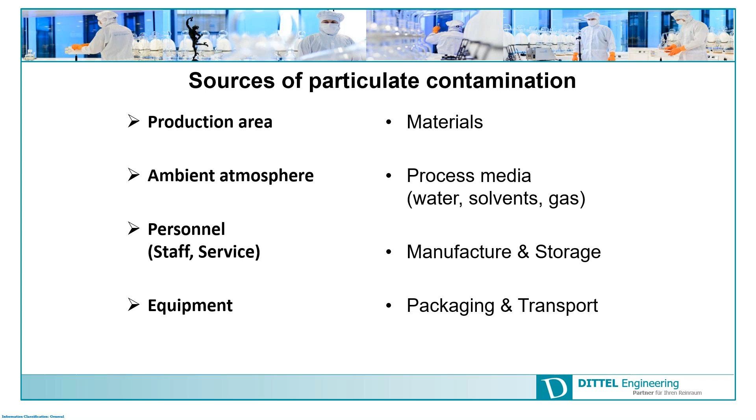The highest risk point on this slide is the thematic of the staff, because it is not so easy to handle the staff and bring them all the ideas you have, or to train them. They need to understand how a clean room, or our clean room technology, is working.

Here, by the air circulation, you see in a short rundown that you have a clean room, with the entry area from the change room, from the airlock, up to the process area. The whole area is managed by conditioned, transported air. We therefore have particle separation via final air filtration.

It depends on the classification of the processes and the room itself. We have the conditioning of the air, and we have the pre-treatment of the fresh air. We need around 20% of the total process area as fresh air. If you have around 100 cubic meters an hour, you have around 20 cubic meters of real fresh air, and you have an exhaust of the contaminated air.

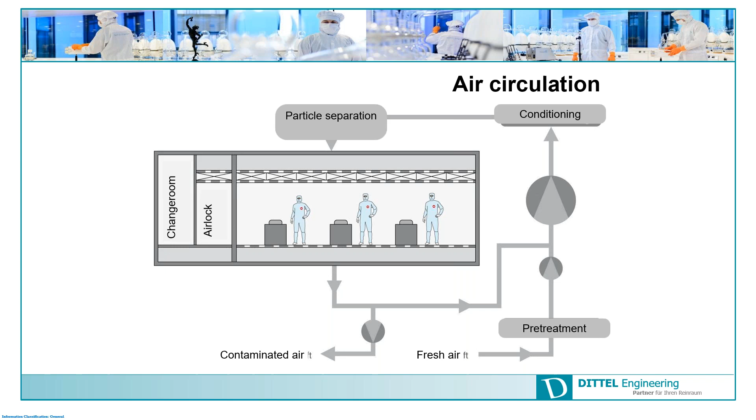So next, the pressure cascade. Here you see the clean room systems with the fluids, with different classifications managed by ISO class 6 or by GMP. GMP, good manufacturing practice, is responsible for the total system of aseptic technologies, with an intersection and intercommunication between the non-aseptic and the aseptic technologies. So for each sector, each different class, we need around 10 to 15 pascal as a differential pressure, and this 10 or 15 pascal is maintained from one area to the next.

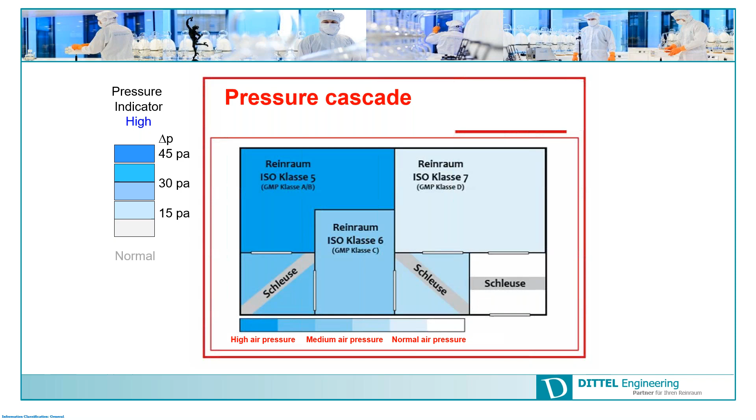But you have to consider this classification and the hygiene factor, so please consider as well what type of persons, how many persons, how many service engineers, how many visitors - all these factors complete the total air consumption and all the necessary requirements for the ISO and GMP classification.

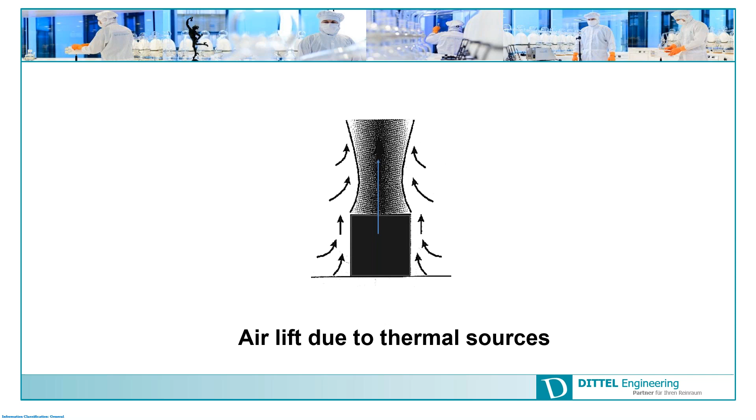Most of the time, we never look at thermo and thermodynamics and fluid dynamics or air fluid dynamics. This will show you a very simple picture: you have a heat-up sector, and the complete air which passes by in the final filtration system nearly touches the process area, then heats up and turns back, and you get a big circulation in the room, a highly turbulent system, which should not exist.

Better you see this here in a picture. You see here the Sahara, you see here the end of Spain, and the outdoor - this deep pressure weather from the Azores brings you high turbulence from the Atlantic Ocean, and therefore a lot of rain. And right now we don't like the rain - we have so much, and we need much more sun.

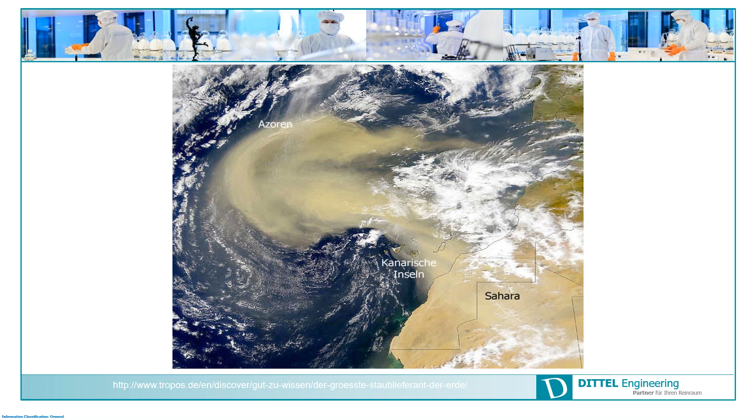So in this case, the heat-up of the air in a special way - here you see the process type of our planet brings us the same thermo and airstream dynamic that you have in the clean room.

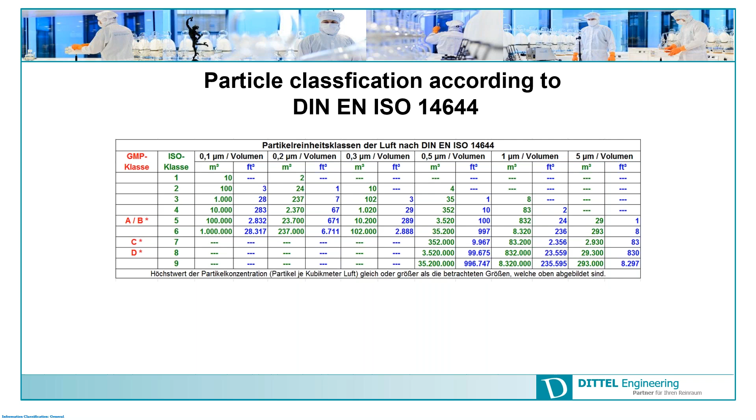So, downstream velocity of particles. It's very nice if you sit at home in your living room and you're looking at a spotlight, and on the spotlight you see, oh God, what's happened - a lot of particles running around or flying around, and they are still in the air.

To give you a small impression about the theme of downstream, here you see a particle of 5 micrometers in size, which has a theoretical velocity of 1.4 by 10 to the -3 meters each second. So this particle needs 23 minutes and 49 seconds, theoretical calculation, to settle out over a distance of 2 meters, and that is not very much.

If you go down to the GMP number of 0.5 micrometers, it takes 1 day and 3 hours. And if you consider a particle in a microelectronic facility or in biochemistry and bio-nano themes, a particle of 0.1 micrometers needs around 13 days to settle down to the floor. Then you come very motivated, like doing a broom, running around, and behind that is a factor of square 2 - all the particles are still in the air at around 1.7, 1.8 meters, and everything you thought had fallen down is still in the air again.

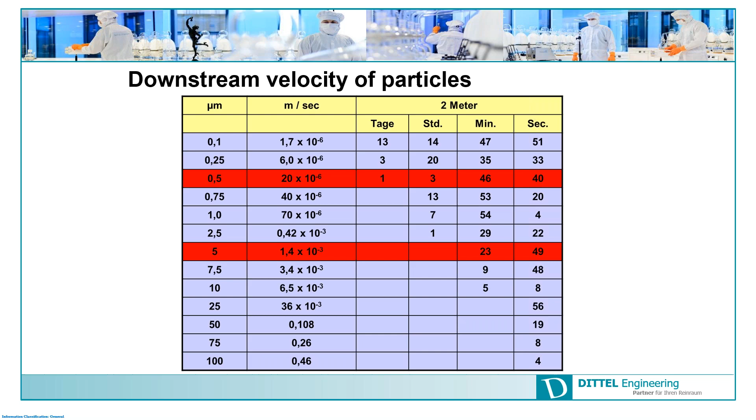Okay, so to see the sizes and have a small impression about the sizes - where is the smoke here - so for a good cigar, it's nice. So you have the smoke particle, this is around about 1 micrometer. Then you have the dust with about 5 micrometers. You have the fingerprint, and the fat zone of the fingerprint is around about 30 micrometers.

And a hair of this young little lady sitting here in front of me - yeah, I have guests with me, that is very important - so the hair has a diameter of around about 60 micrometers. And to stop such things contaminating the air...

If parts like this contaminate the air, I give you a small story. A couple of years ago, I wanted to know how clean my environment, or my living room area, was.

So I closed all the windows, put a film in front of the windows, a black one, so that everything was covered and the living room was completely dark. And with a particle counter - believe it or not - in around about 1 day, not one particle was detected by the particle counter.

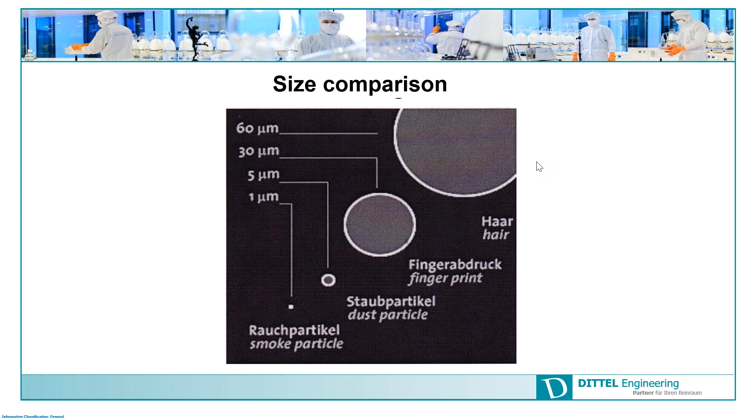And then my wife said, 'Oh, now let's open.' She took only the film away, and then the particle counter started to count and make beep, beep, beep, beep, beep. So what happened? The sun was shining in, and the sun creates a thermal effect, and all the small particles that were located on the surface of the table or somewhere around started flying. And that is the same principle as in a clean room.

And I turned around, and in this moment a glass started rolling, and she caught it with her glove, and the fingernails were in front of the glove. So you see, that shows you that you need a high principle of self-controlling, not only on your duty, on your job - no, you have to have the same principles at home. It's an old truth that the controlling of clean rooms, biological and particle controlling, needs a completely different thinking and a different behavior in your private life too.

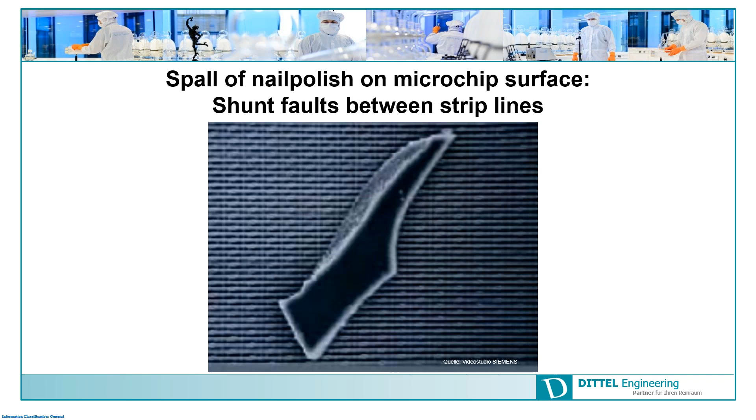So the next topic will be germs, pharmaceutical products. A couple of years ago, what happened - a friend, a good friend, is the owner of a company, and they had a big problem with bacteria and contamination. Where did this contamination come from? After a while, they found that this one guy from the process line had a farm at home.

Every morning he had a shower, then breakfast with his family. The children went to school, and he went to the stall. He went across the farm and looked at his cows, saying 'Good morning, my baby,' and every cow got a pat on the back, and then he started his way to the clean room, to the factory. A couple of days later, they had a big problem.

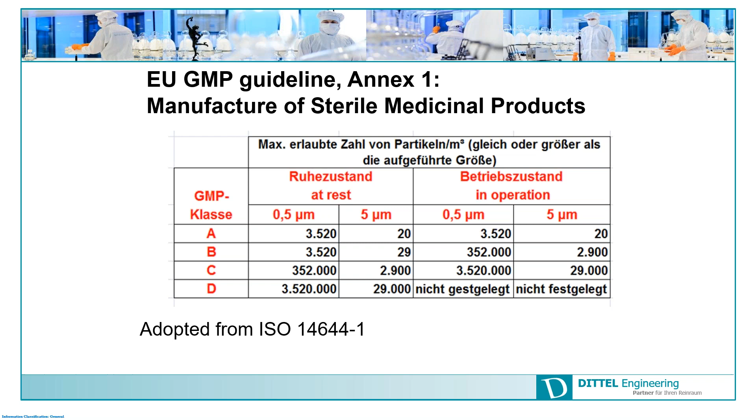Superbugs. If you discuss standard Staphylococcus aureus, that's with everybody. You have some on the ears, on the nose, left and right, on the eyes, and some on the buttocks and in front of the genital area. That is not a bad thing. You control your own, and normally with regular hygiene you do not have a big problem.

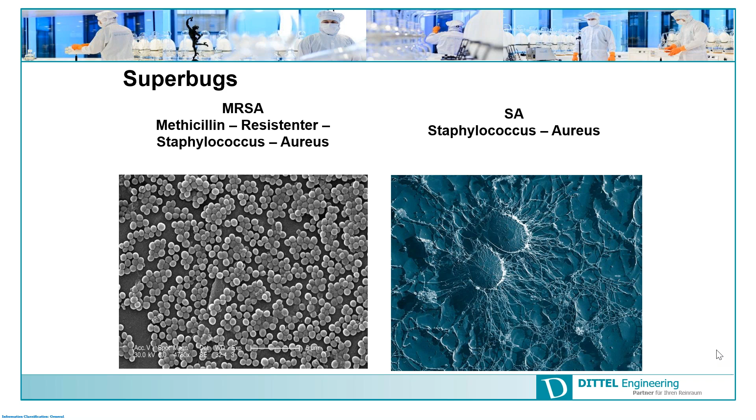The electronics are not doing what I want.

So here you see a few pictures I have taken for you of a multi-resistant Staphylococcus aureus, and all of them were created not on the open market or in the supermarket or wherever. No, created at home or by non-hygienic treatment in a hospital or by a doctor.

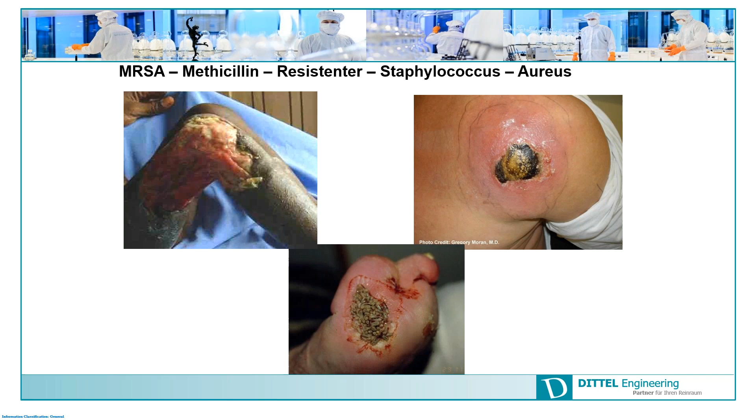So germs on surfaces and contact plates. I know everybody knows it.

What, 20 minutes? Oh, okay. I have to hurry up. Thank you. Showed me I only have 20 minutes left.

Germs on surfaces. It is well known to all of us. But the issue is, if you are not trained over time, it goes wrong. What is going on with the training on hygiene, the complete training, not only for germs but for the use of contact plates: you have roughly 3 months of standing knowledge. After 6 months, you lose roughly 70% of the knowledge, and so you need retraining. Think about that, consider that, and don't forget. I know it is very, very simple, but very simple things are killing our environment in the clean room.

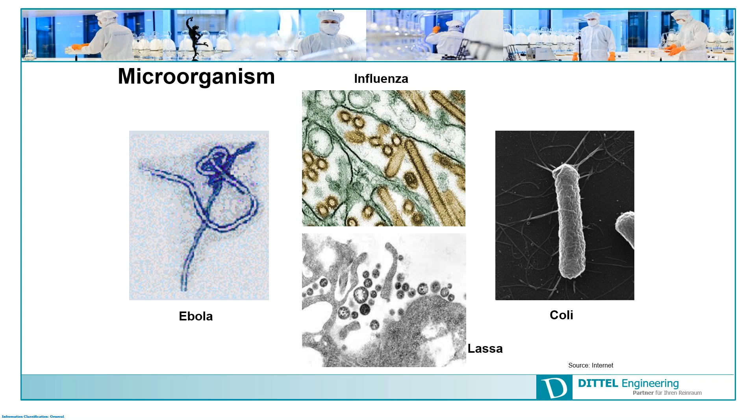Coli is for us here the most important. Influenza, if you have a high temperature by 39 degrees body temperature, you stay at home and you take care about yourself. Coli, nobody is feeling, oh, I'm contacted by a colibacterium. It comes, and if it's your own, then everything is fine. But if it's a foreign one, they don't like to get mixed. Risk included, people and technique. I said before, you have to train the people to reduce your risk.

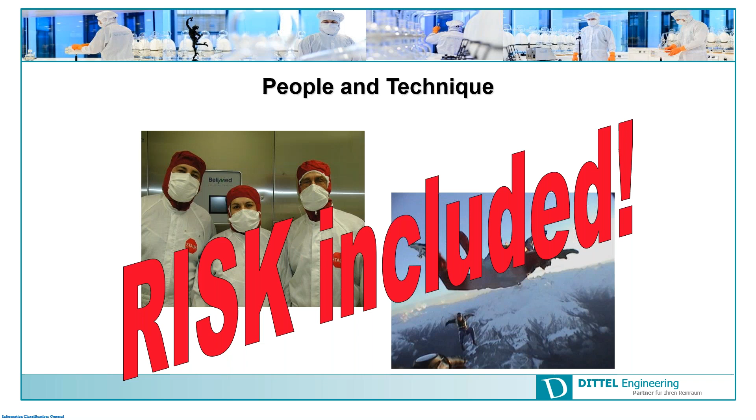How you're doing on your risk management for some field of microbiology. It is like parachuting, or you stay somewhere in an area and you don't know what is going on. And before you start in a clean room or before you start parachuting, you need to be trained, always trained. And training is one of the most, for us as well, one of the thematics that needs professionalism.

Okay, sometimes you see the protocols like on a gas station on the interstate. Yes, I was there 12:15. The next cleaning 1 o'clock in the afternoon. The next and so on. That has nothing to do with professionalism. So the protocols, they are very important, first for ISO 9000, and for your GMP and later on for your FDA compliance.

So wiping sweat from the forehead. Yeah, it's nice. He's doing this right now, and wow. And you take your hands and bring them to the trouser, and yeah, you see it. That is not a fairy tale. That's a real story, and that is going on every day.

And most of the time, if nobody looks at them, you have manufacture with torn gloves. Yeah, torn, cut. The torn glove. You have the face scratching, so it's nice. Or the hair. Yeah, that is the reason why after a couple of years the hairs disappear on this point. Not your hair, but sometimes it's, yeah.

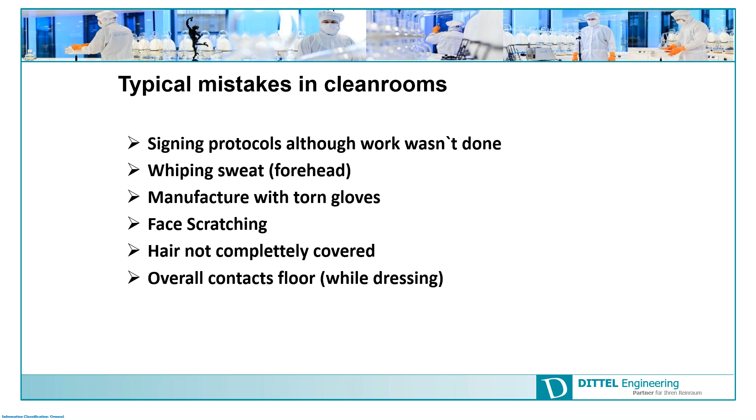So, impact on production hygiene. The personnel, together with the management, the production personnel, the staff, and the external personnel. If you have external personnel, you have to control them. You have to look at how they are washing the hands in the black or the outside area, how they make their sterilization of the gloves, and do they use the garment perfectly, etc. And the same is for the management.

It was here not far away from us, a pharmaceutical company. We had an audit, and it was perfect. Then the CEO came in, dressed perfectly in clean room dressing, with a few Japanese people. Everybody was perfect. He directed them to the processes, then he left with the group, and then the door opened again, and he came in with his suit, not in clean room dress. "I forgot my mobile phone." So the audit was gone, finished. And that's another story.

You see, the management needs more or less the same training as the personnel, or the management will be guided in the clean room. It is not like a jumping area where you can go in and go out. And the same situation if the horn is ringing and you have an alarm, you have to go in. You need to dress. If not, the complete clean room is contaminated with unknown particles, and in this case with unknown microbiological material.

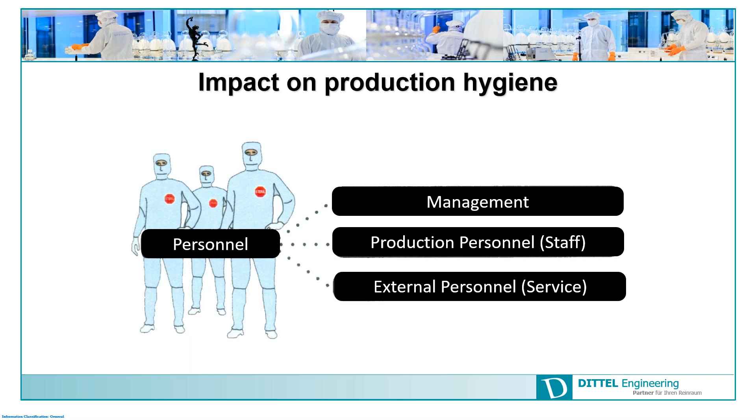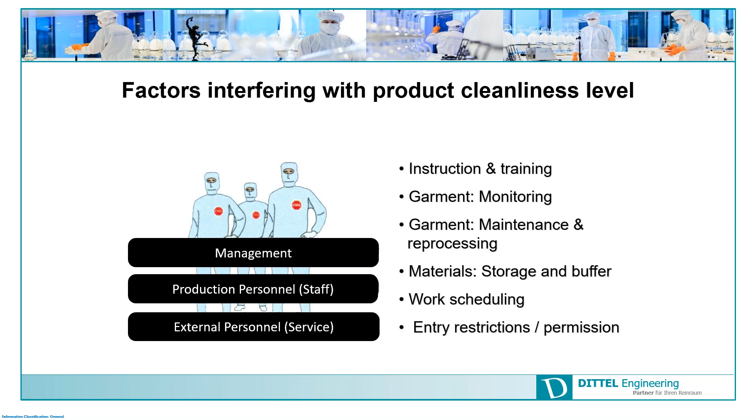And the staff as well needs the training. So that is the same with interfering factors for the cleanliness level of the product. You have the management on one side, you have the production, and you see the instructions, the garment, the maintenance and reprocessing, and so on. So let us see. Flows. Very easy from the gray area to the clean room. It is not a very complicated situation, but if you're following these three blocks here, you will never do something wrong. So use it as you have to use it. In this case, everything is fine.

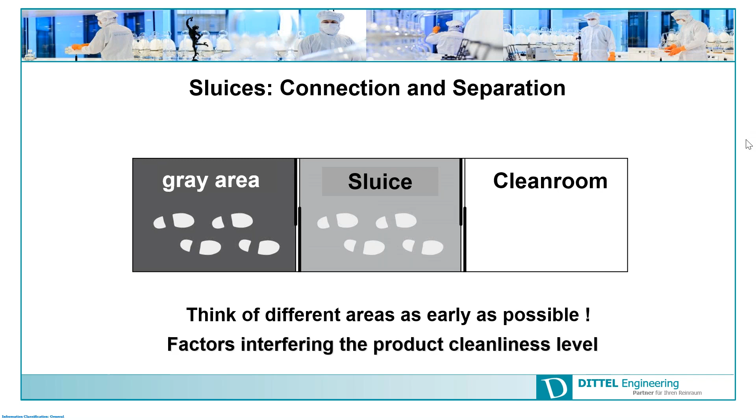So, geht's wieder? Sure. That is high tech, I call it. Geht nicht.

So here you see the entry system. You see outside it's a gray area. You have the black boxes. So it's arranged across the corner so that nobody is able to enter without using the sit-over bench. So, geht wieder nicht.

And if you start with a project, please, before you start thinking about which engineering and which area, start with a user requirement specification. With the user requirement specification, you find out which types of SOPs and which sectors you need. So that is just a small help.

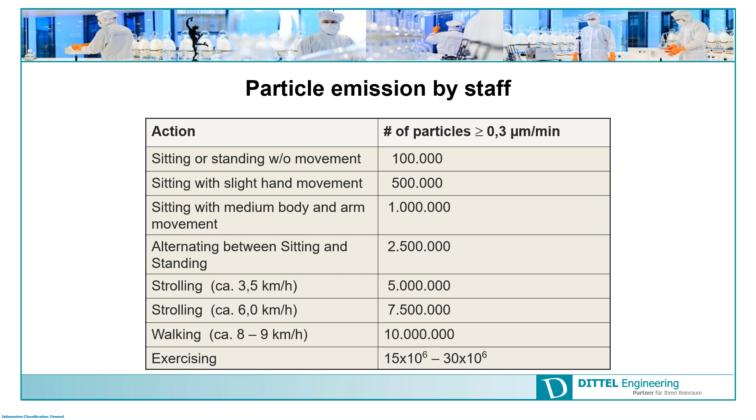Another story: during an audit, the audit was good, fine, but on the other side of this area there was a building with the CEO, who had a direct view into the clean room area. The people in the clean room were standing there, we had a discussion and everything was fine. Then the door opened, the boss came in and was shouting to everybody, move and go on with your job, why do I pay you, and so on. Okay, thank you very much. Half a year later, the company did not exist anymore. So you see that it's important, and if you consider everything the right way, you never go wrong.

Germs, the distribution: finger touch, hand touch, sneezing, saliva, and nose secretion.

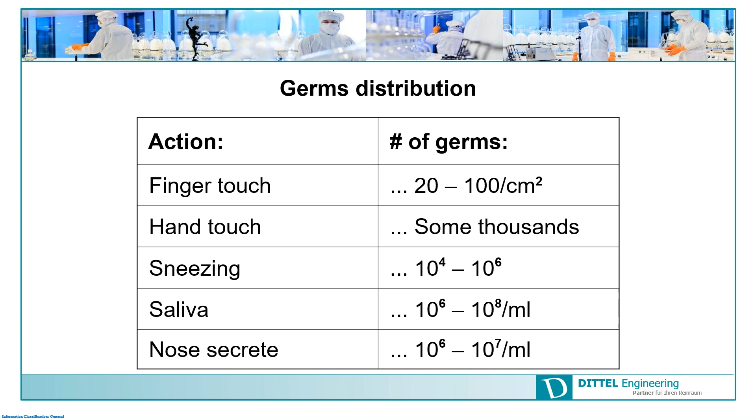You see how much it is: finger touch between 20 and 100 per square centimeter, hand touch a few thousand, but nasal secretion is 10^6 to 10^7 per milliliter. So hand disinfection: we say you pray 3 times, and that is, from the time, very good. Or for children, I tell my grandchildren, okay, if you start finger washing, sing a song, Hansel and Gretel, 3 times, and that is working.

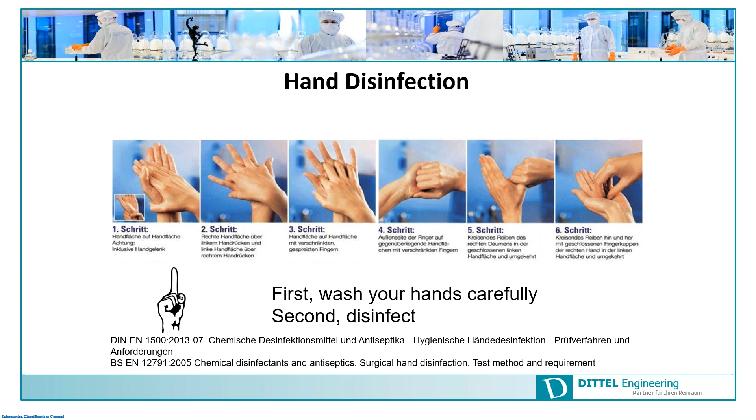So you need a time frame, which step, and last but not least, how much and what time. It's just learning by doing. But what is very important? First, wash your hands carefully, and second, disinfect. So you need a hand wash. That is the same as brushing your teeth in the morning, after lunch, and in the evening. And then to wash the fingers as well.

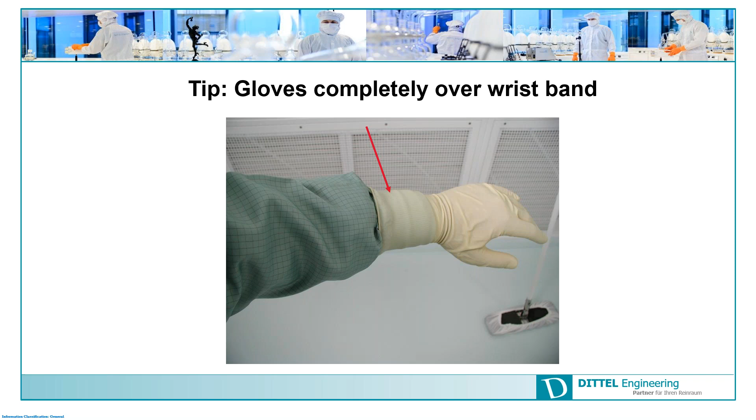Okay, so gloves. Most people are using gloves like Robin Hood, and so in the front the skin is exposed and so on. So you see here how a glove is used. It is important that nothing comes out covered with skin particles and hairs, because everything is rubbing inside.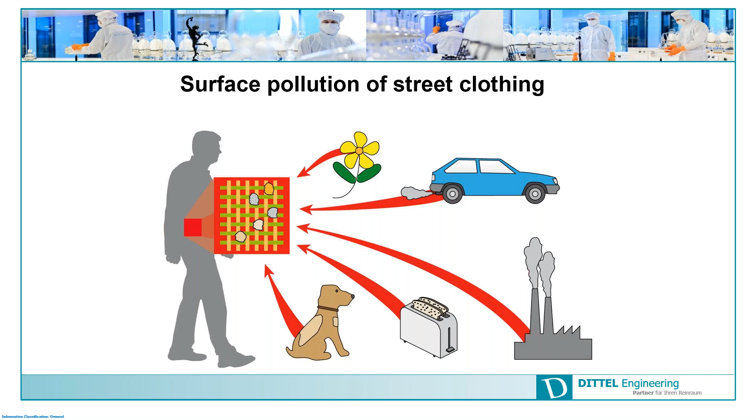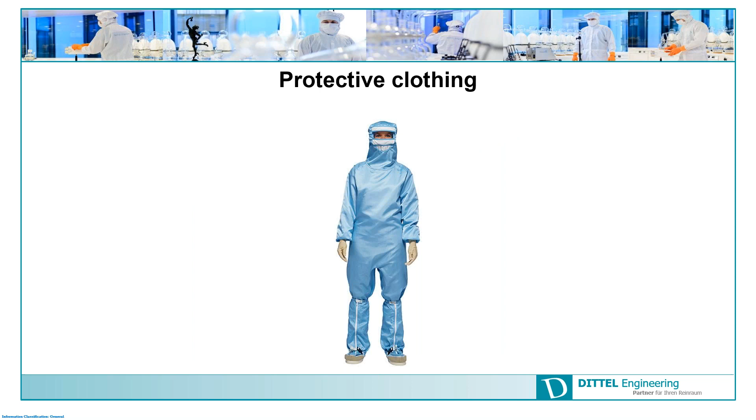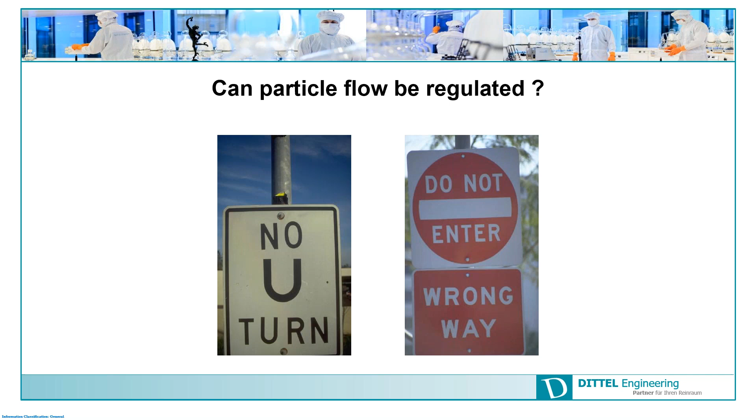So you see why? Here you have the fibers of a sweatshirt, a t-shirt, a polo shirt, and everywhere in between you have these little particles and a lot of microbiological contamination. So protective clothing looks like this, and there is no U-turn, nothing. If you go in like that, you are going the wrong way, so regulating particle flow is not possible. The unclean side, step over, and the clean side.

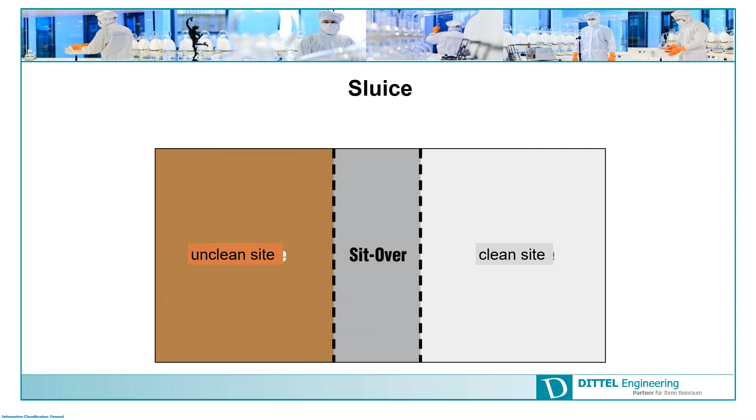It is very simple, but the symbolism should be accepted and well known by the people, because believe me, after 6 months and more, nobody is thinking about such things. They step over with their shoes and everything, never thinking about that. So now I'm nearly finished, and I hope that it was okay for a short introduction.

Yes, thank you for this. We do have a couple of questions from the audience. The first question was, what is a class 7 clean room? If you can give more details about that.

Okay, a class 7 clean room is more or less GMP classification class D. A class 7 clean room is defined by the standard ISO 14644. So normally ISO 7 has nothing to do with GMP. ISO 7 is just a classification number.

It documents how many particles are allowed, from 0.3 micrometers, or in the latest system 0.1 micrometer, up to the standard regulatory 0.5 and 5 micrometers and so on. But it is just for non-aseptic use. GMP is one side and ISO 7 is the other side. Next: how to properly insulate clean rooms while ensuring they are fire resistant.